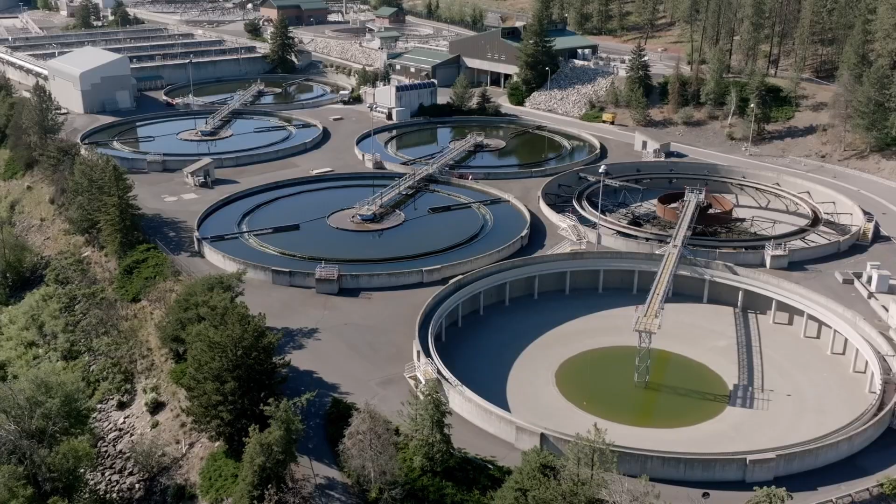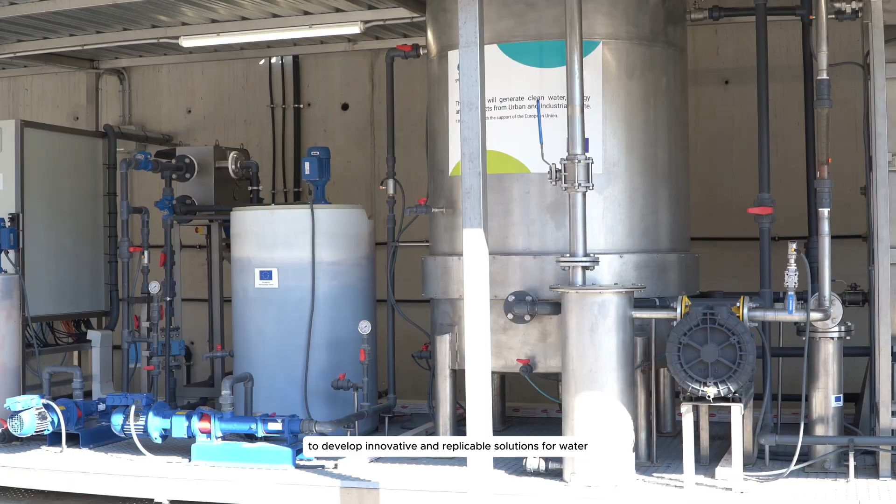Symsites is a Horizon Europe project bringing together 31 partners - companies, research centers, universities, and public administrations - to develop innovative and replicable solutions for water, energy, and resource recovery across Europe.

Across the continent, climate change and increasing industrial demand are putting freshwater resources under growing pressure. Energy dependence and the rising volumes of urban and industrial waste compound the challenge.

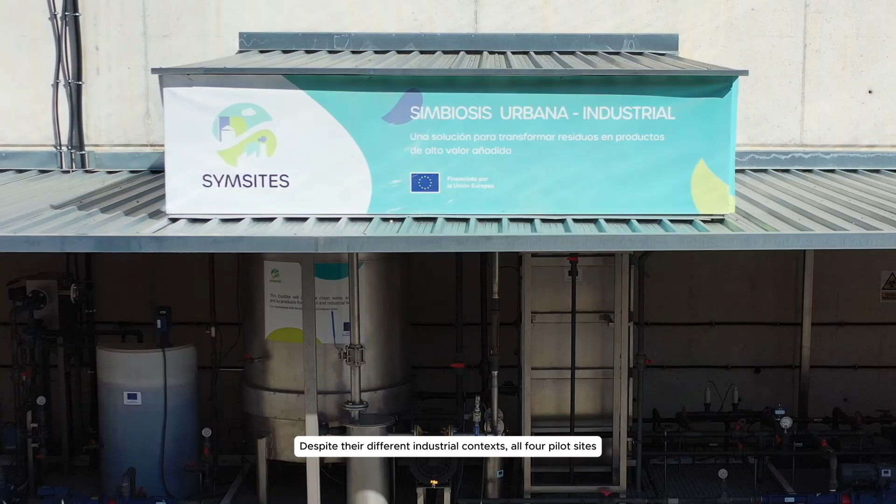Symsites addresses this through 4 ecosites located in Spain, Denmark, Austria, and Greece, where wastewater and organic waste are transformed into valuable resources. Despite their different industrial contexts, all 4 pilot sites share the same core process: anaerobic digestion.

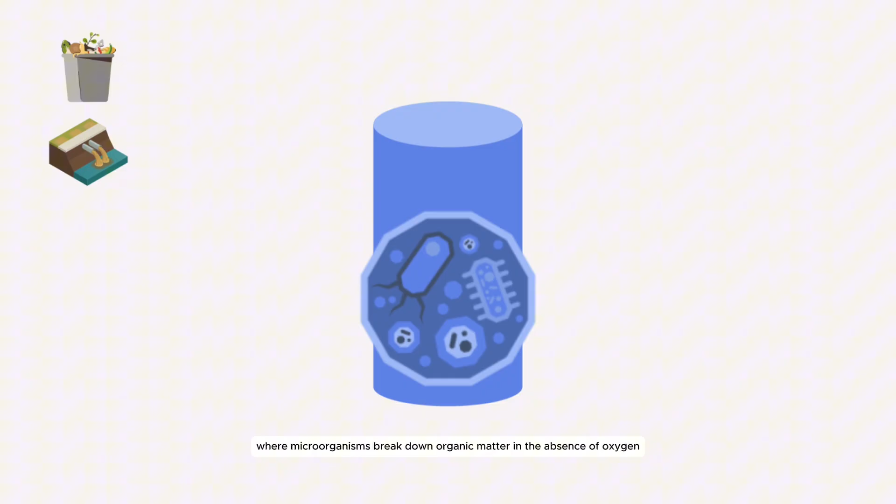Organic waste and wastewater are fed into a bioreactor where microorganisms break down organic matter in the absence of oxygen, producing biogas as renewable energy.

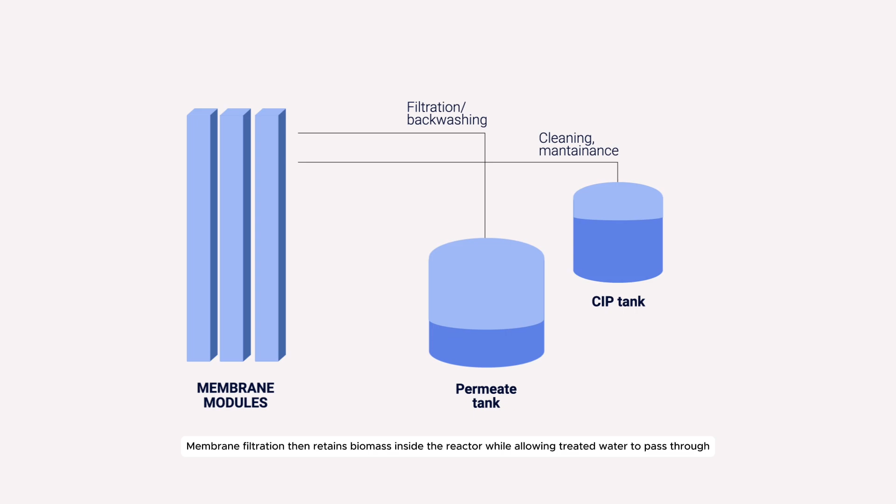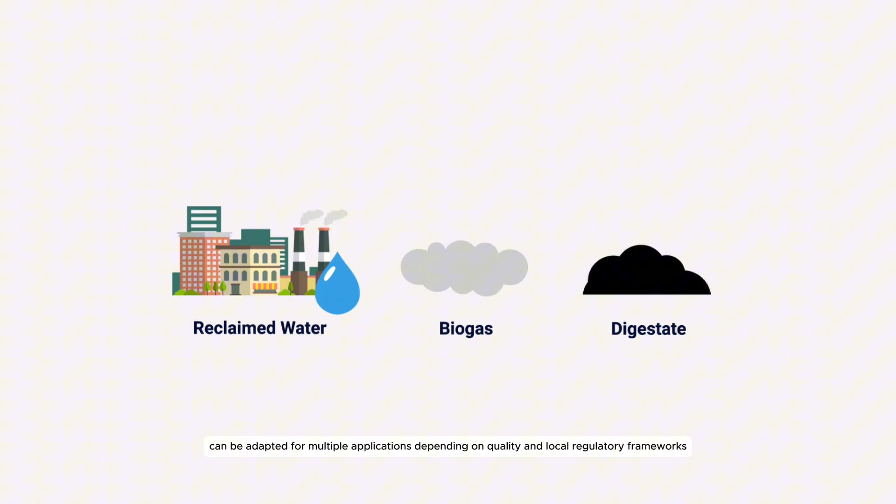Membrane filtration then retains biomass inside the reactor while allowing treated water to pass through. Where needed, biochar adsorption columns and membrane contactors provide a final polishing stage, removing residual pathogens and micropollutants and recovering nutrients. The outputs - reclaimed water, biogas, and digestate - can be adapted for multiple applications depending on quality and local regulatory frameworks.

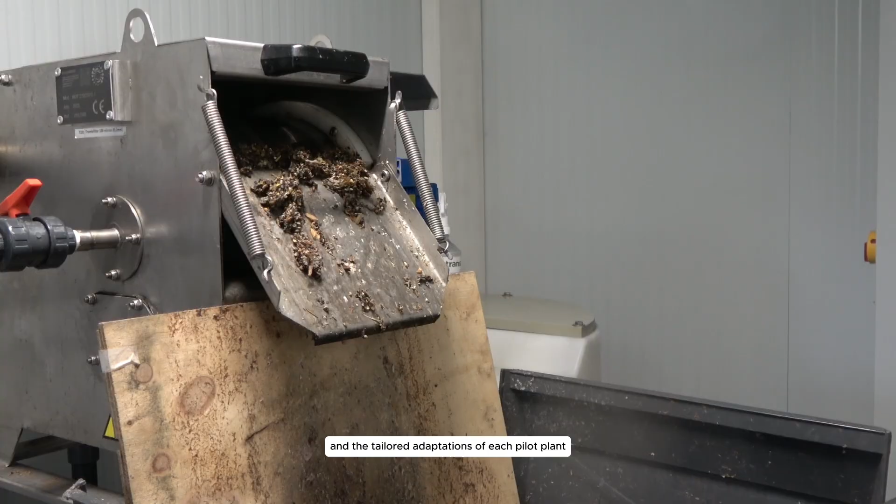What makes each ecosite unique is the integration of locally generated industrial residues and the tailored adaptations of each pilot plant. This creates processes that follow the same vision, yet are specifically designed for the realities and opportunities of each region.

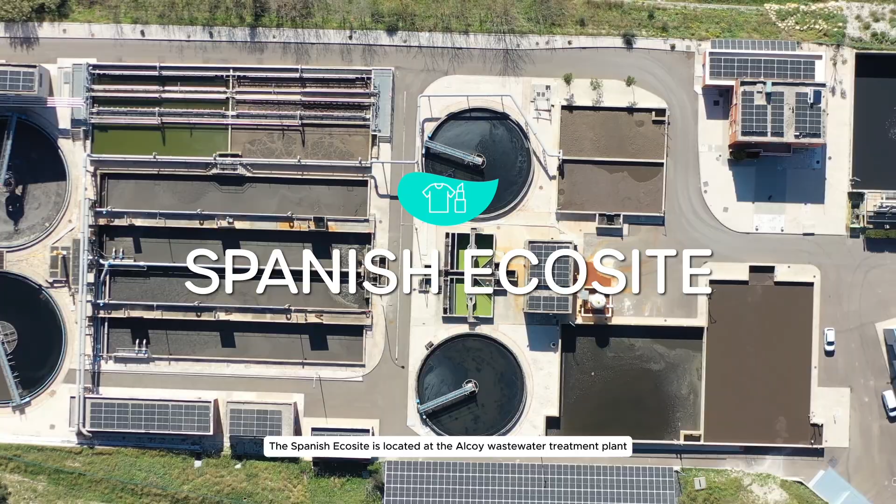The Spanish Ecosite is located at the Alcoy wastewater treatment plant, in a region characterized by a strong textile and cosmetic industry and by some of the most severe water scarcity pressures in Europe.

The Spanish Ecosite is specifically designed to address a key challenge: the removal of emerging contaminants and the recovery of nutrients, to achieve reclaimed water tailored for multiple reuse applications.

The substrate combination here is urban wastewater and organic food waste selectively collected from municipal entities such as schools and nursing homes. This is where the Alcoy process diverges.

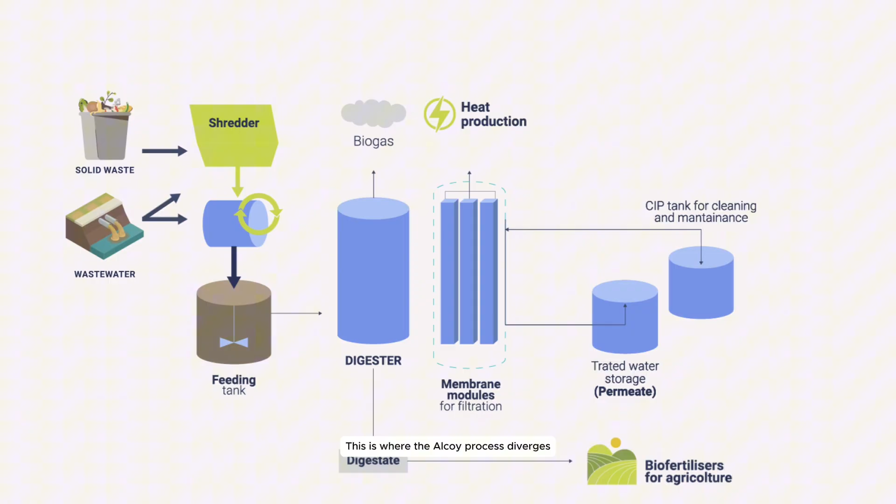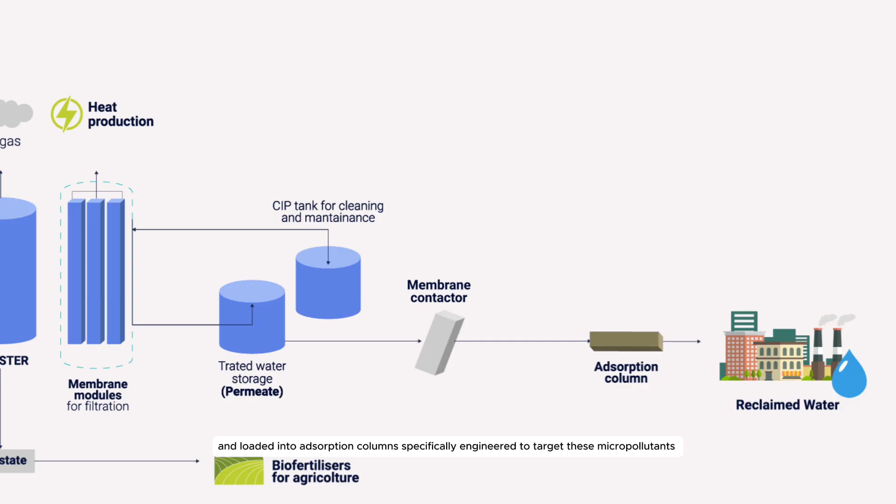Non-recyclable industrial residues are pyrolyzed into biochar and loaded into adsorption columns, specifically engineered to target these micropollutants - a purification step that goes beyond what standard digestion and membrane filtration can achieve.

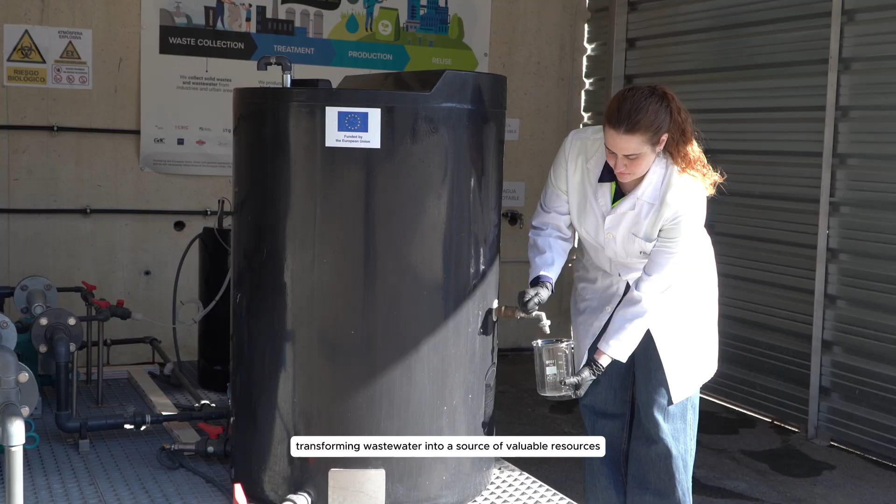Additionally, membrane contactors enable nutrient recovery, transforming wastewater into a source of valuable resources. The result is reclaimed water meeting the quality thresholds required for industrial, agriculture, and urban reuse in a region where every recovered liter counts.

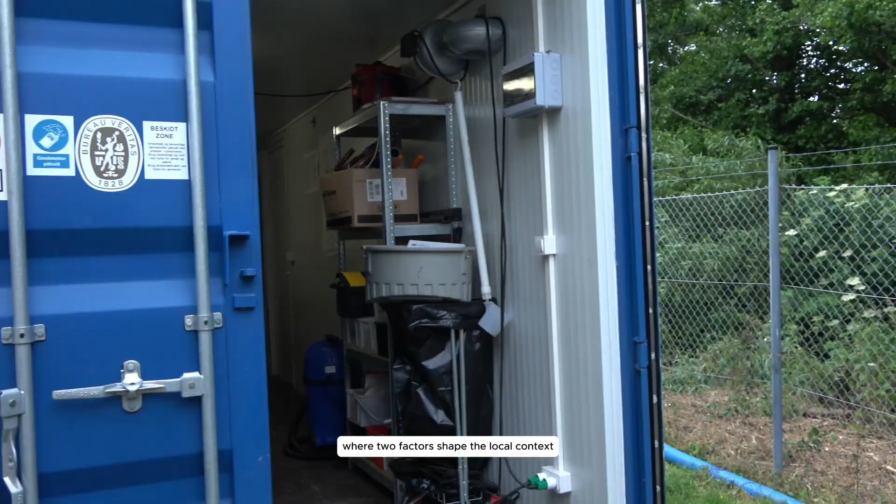The Danish Ecosite operates on the island of Bornholm, where 2 factors shape the local context: a thriving craft brewing industry and a recurring seasonal water deficit that leaves farms exposed to drought every spring and summer. In this ecosite, the challenge is to combine substrates of different origin - urban wastewater, brewery effluent, and food waste.

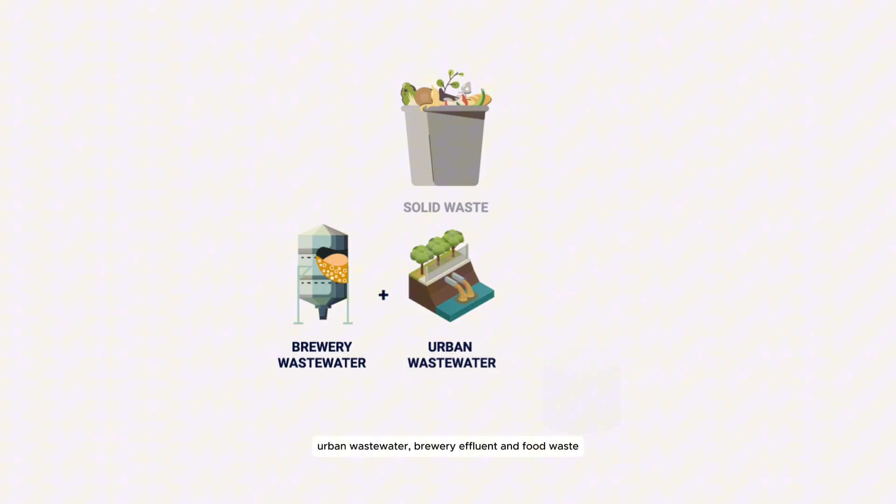This combination achieves a sufficiently high biodegradable load for efficient anaerobic digestion. The solid residues from brewing - spent grains and other dry matter - follow a separate path.

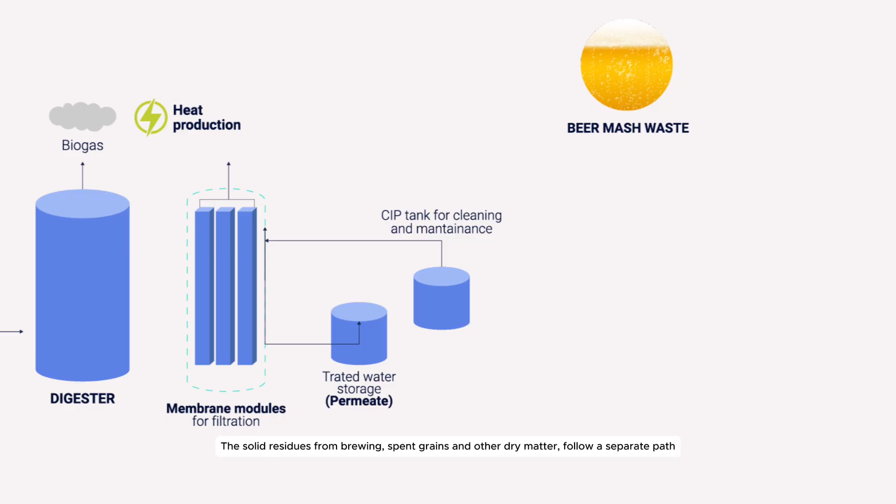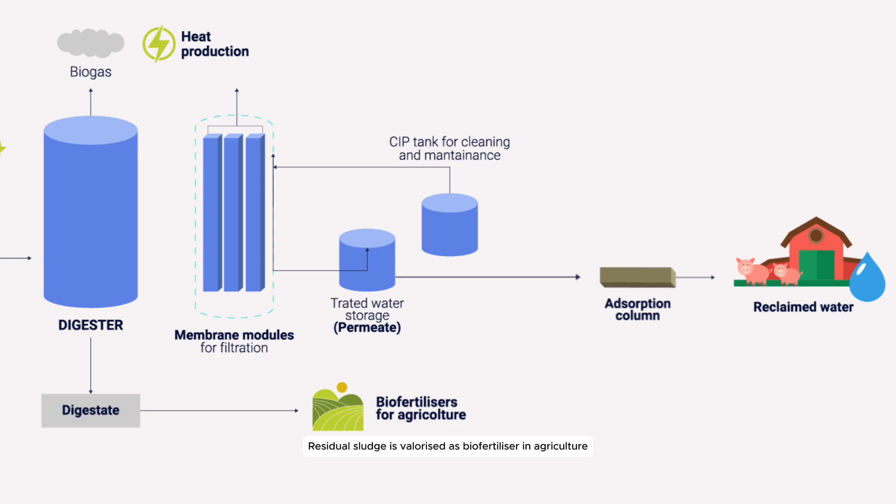Dried and pyrolyzed into biochar, they provide the final purification stage for the treated water. Residual sludge is valorized as biofertilizer in agriculture. The reclaimed water is made available precisely during the dry months when Bornholm needs it most.

The Austrian Ecosite is built around Berger Schinken, a meat processing company central to its regional food system, sourcing animals from local farmers and supplying meals to nearby schools.

This dual role defines its waste streams: industrial wastewater from production, blood from the slaughterhouse, and food waste collected directly from the schools it serves.

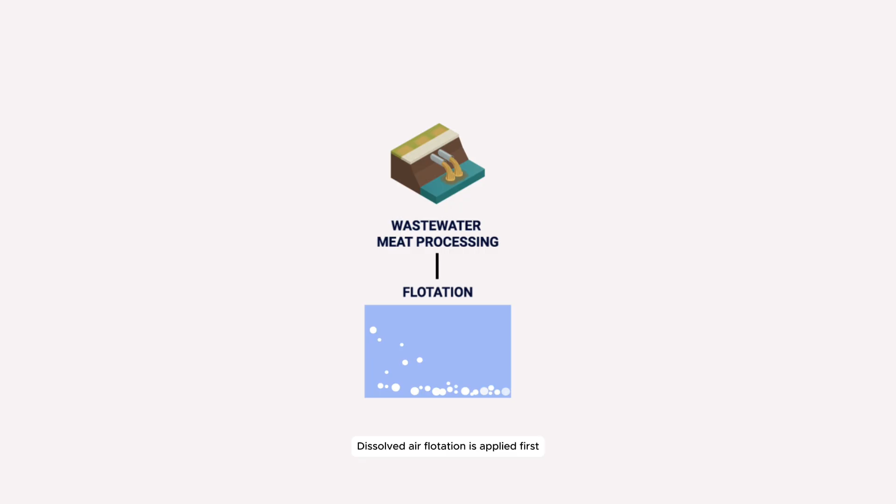The industrial wastewater is relatively diluted and therefore requires a concentration step before entering the anaerobic digester. Dissolved air flotation is applied first: flocculants bind contaminants into clumps that are lifted to the surface by fine air bubbles and then separated.

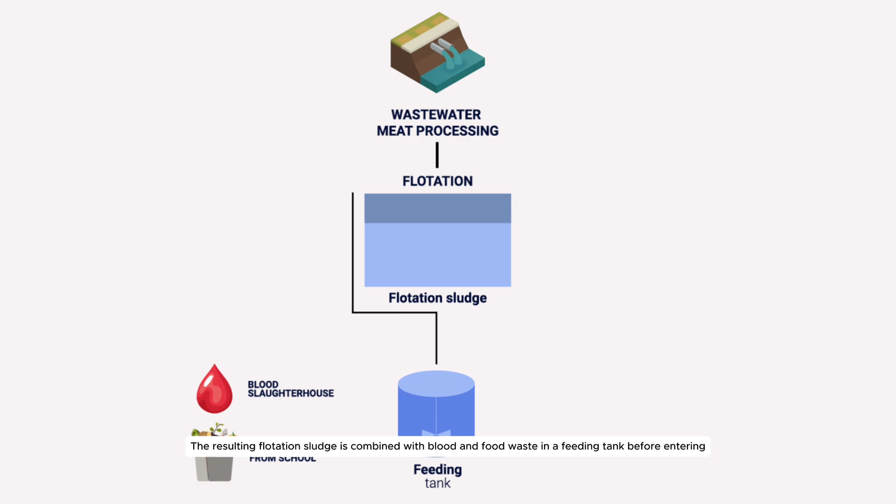The resulting flotation sludge is combined with blood and food waste in a feeding tank before entering the digester. A process unique to this ecosite is the valorization of slaughterhouse bones.

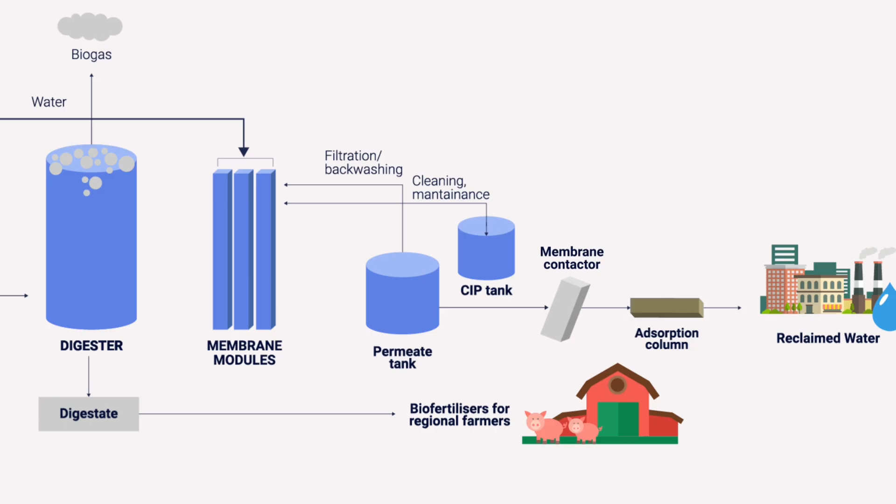Rather than being discarded, they are pyrolyzed into biochar, used in an adsorption column to polish the treated water before reuse. The digestate, rich in nitrogen and phosphorus, is returned to the regional farmers who supply the company, closing the nutrient cycle within the same local network.

The Greek Ecosite, located in the Achaia region, faces a waste stream with no equivalent at the other sites: olive mill wastewater. This highly polluting effluent, characterized by high organic load, phenolic compounds, and low pH, is generated seasonally during the autumn and winter olive pressing period, and has historically been one of the most difficult agro-industrial effluents to treat.

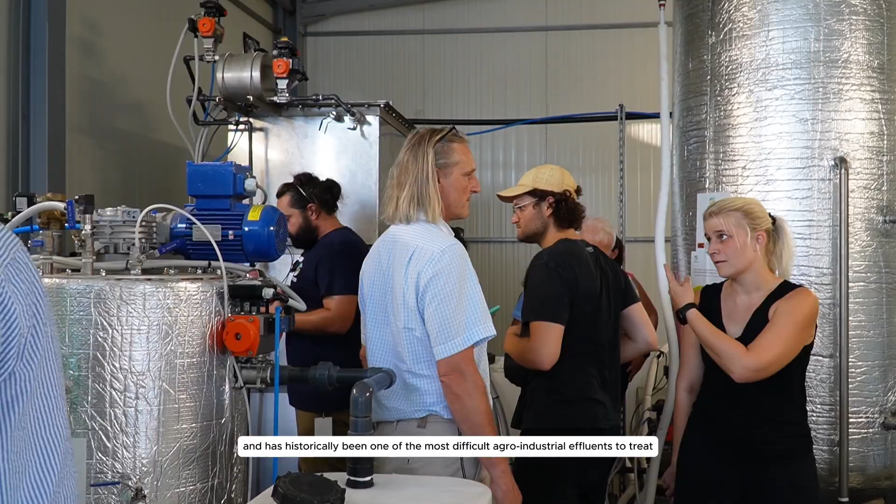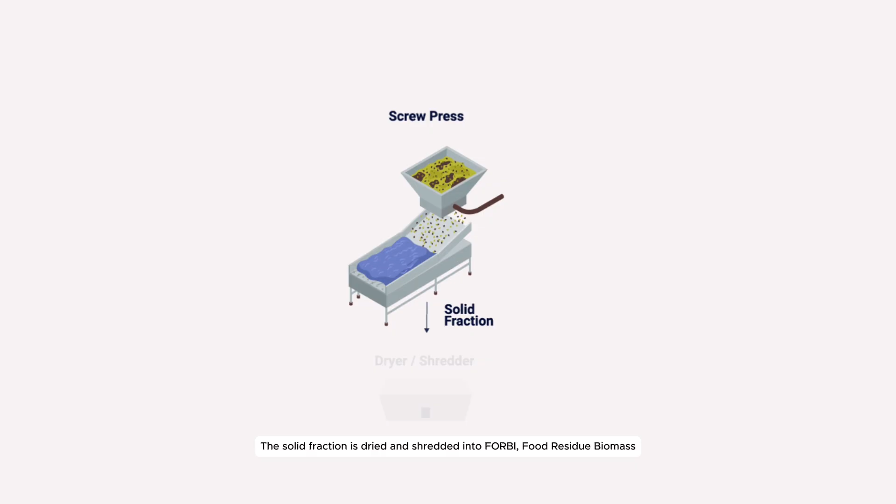2 additional valorization streams further distinguish this site. Food waste is processed through a screw press, separating solid and liquid fractions. The solid fraction is dried and shredded into food residue biomass, and later composted together with green waste to produce a structured soil amendment.

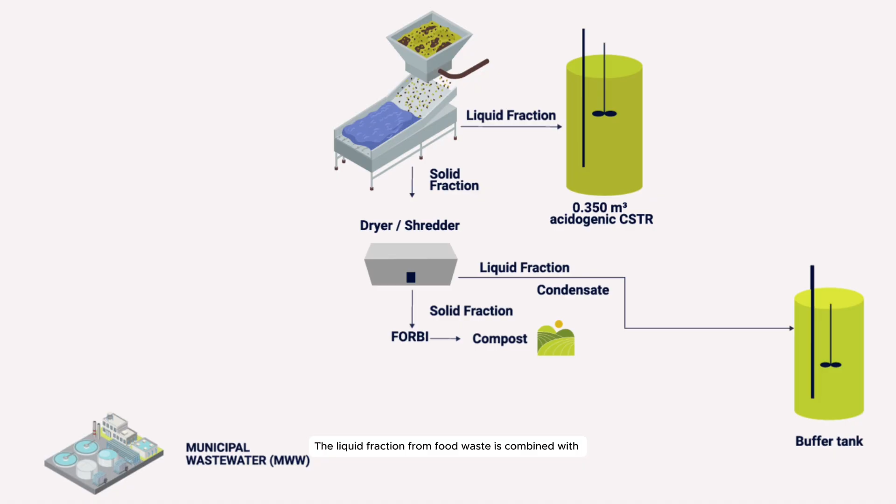Olive stones, the lignocellulosic residue of oil extraction, are instead pyrolyzed into biochar, which is later used for adsorption polishing of the treated water. The liquid fraction from food waste is combined with municipal wastewater and olive mill effluent inside the treatment line.

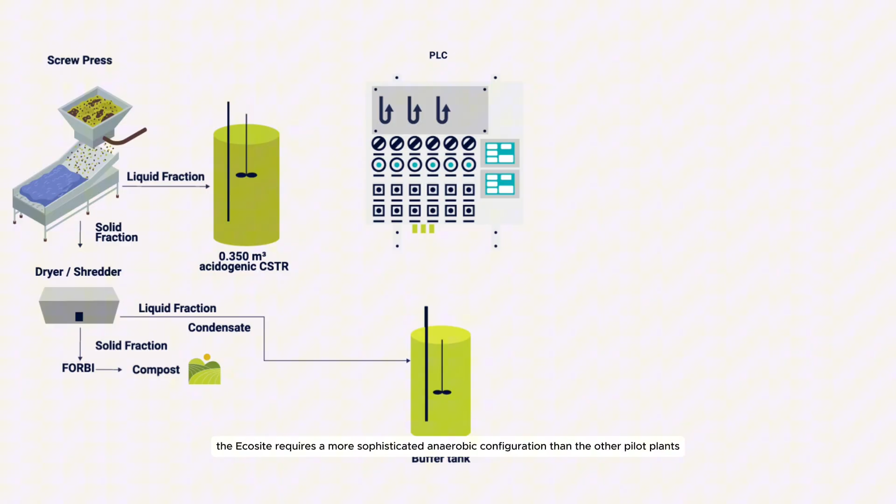Because of the strong seasonality and chemical complexity of these streams, the Ecosite requires a more sophisticated anaerobic configuration than the other pilot plants.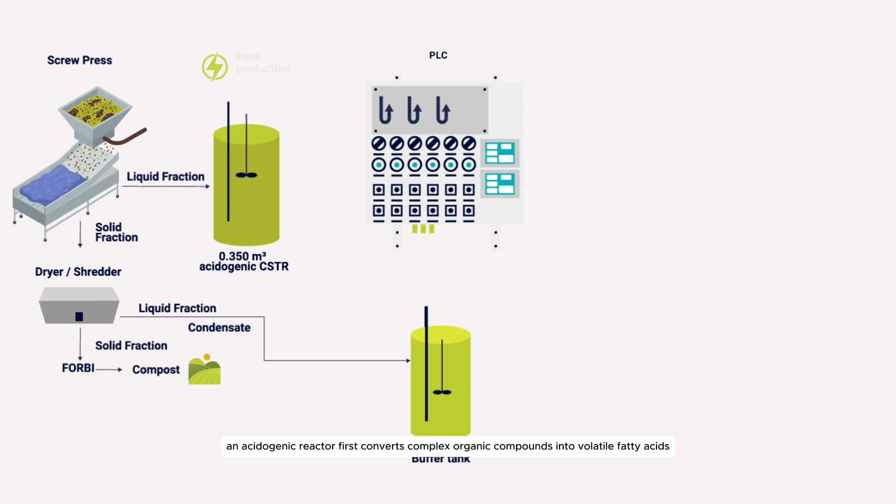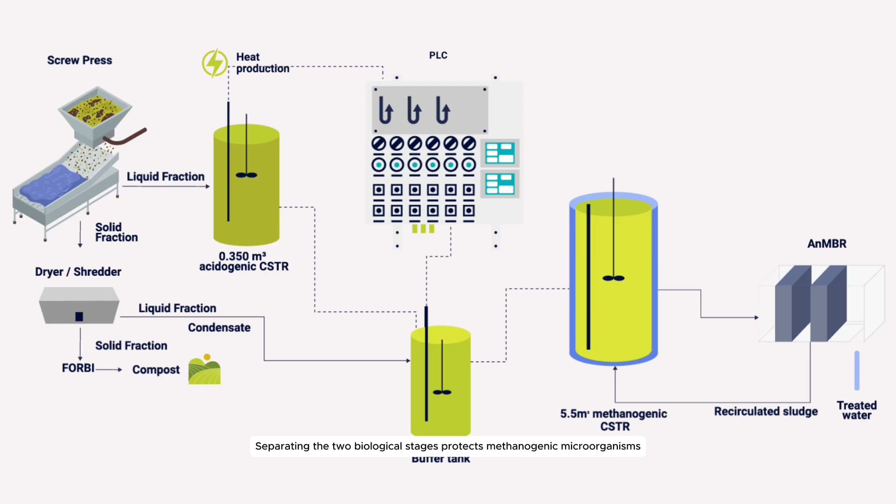Rather than relying on a single-stage digester, the Achaia plant operates a 2-stage process. An acidogenic reactor first converts complex organic compounds into volatile fatty acids and produces hydrogen, which then feed a methanogenic membrane bioreactor. Separating the 2 biological stages protects methanogenic microorganisms from process instability and maximizes biogas production despite highly variable seasonal inputs.

The system produces the following outputs: biogas rich in methane, hydrogen, reclaimed water, and compost. Austria, Denmark, Greece, Spain.

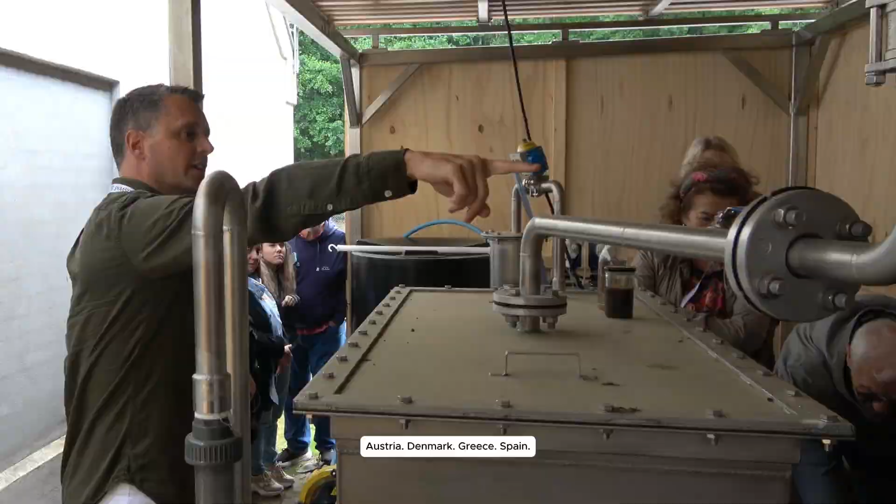4 industrial contexts: meat processing, brewing, olive oil production, textile and cosmetic manufacturing. 4 different substrate combinations. 4 sets of local constraints.

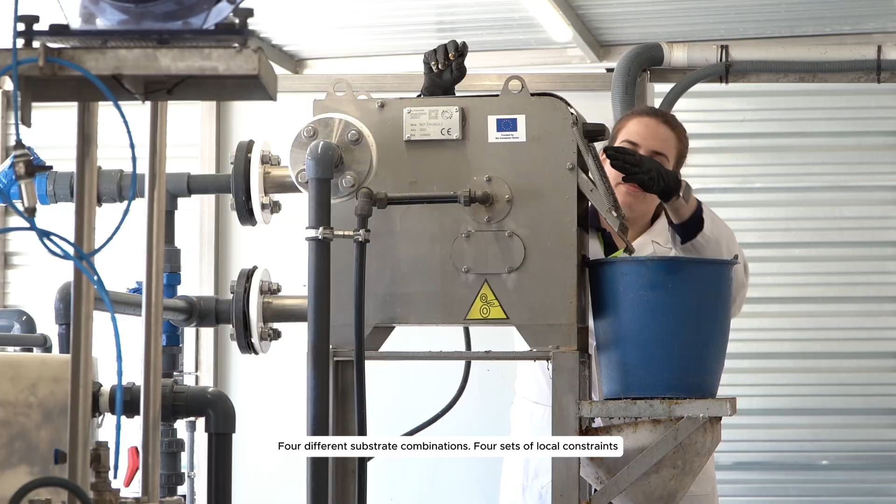And in each case, the same framework adapted to meet them: anaerobic digestion at the core, membrane filtration, and biochar adsorption columns as the tools for refinement.

What Symsites demonstrates is that urban industrial symbiosis is not a theoretical model. It is a technically proven, replicable framework, already operating across different regulatory environments, climate conditions, and industrial sectors.